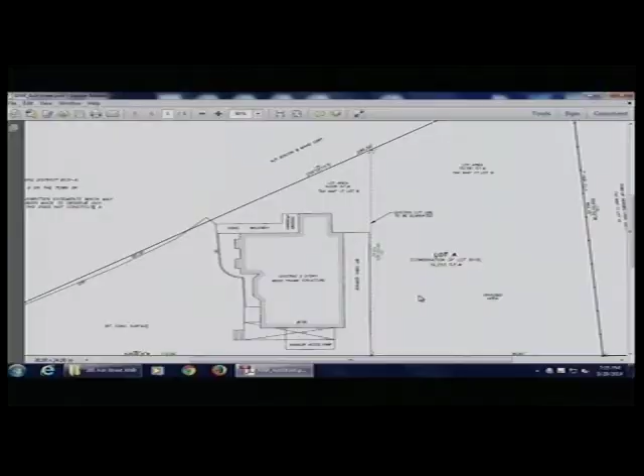So is it 198-202 or is it 198-200? It's 198, and then there was a two-family on the lot on the right, which was 200-202. Okay, and then that house got demoed about 4 years ago. So basically it's two separate parcels of land under common ownership. In order for Dr. Ravens to do the addition that we're going to next on the site plan, he needs to eliminate that line, so we're making two lots into one. That's fine, I'm just saying there's a difference.

Oh I see, so lot A is the whole thing - one says 202 and then the decision says 200. That's why I just want to get it all right. George's memo says 202, okay, we can amend that. All right, so lot A is all the way to the corner. I thought it was two lots here, but it's... right? Yeah, okay, okay.

All right, any issues, comments, questions? Can I get a motion? Move that the board endorse the A&R for 198-202 Ash Street. Second. All those in favor?

Now, is it easier to move over to this other A&R, or stick with this parcel? What do people want to do? Oh sorry, that means you'd have to hang around until whenever. Right, the South Street parcel is only here for the A&R. Correct, let's just knock that out. Get 'em in, let's knock that out.

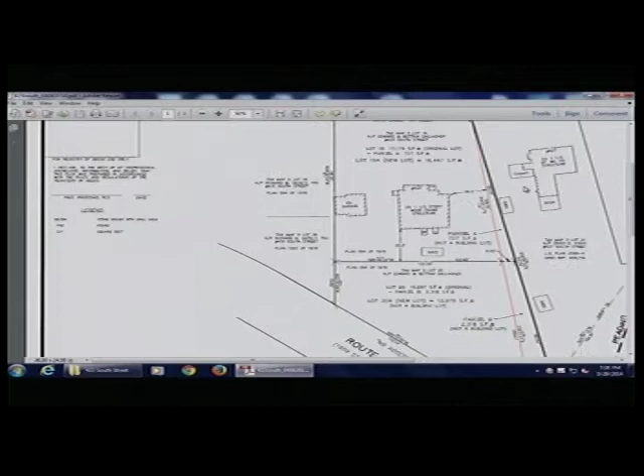I don't remember reviewing this in my package. It's page 44. Yeah, I got 46 here. Yeah.

Okay. Did we have a memo from George on this? That's on page 47. Oh, I remember that.

He mentioned adding a certain notation to the plan, and the plan in your desk packet does reflect the change. Jack prepared a change, as recommended by George, to indicate what the purpose of the plan is, which is to convey these two slices of land to Mr. Kika.

A and B. Where's A? I see B, I'm not finding A. A is the slice right above it, I see that, the smaller slice. How do these things get created? How do they get these two little slivers here? How does this end up like this? It's so weird. Well, the slivers aren't there, the slivers are being created. Oh, I'm sorry, I thought it was to combine them.

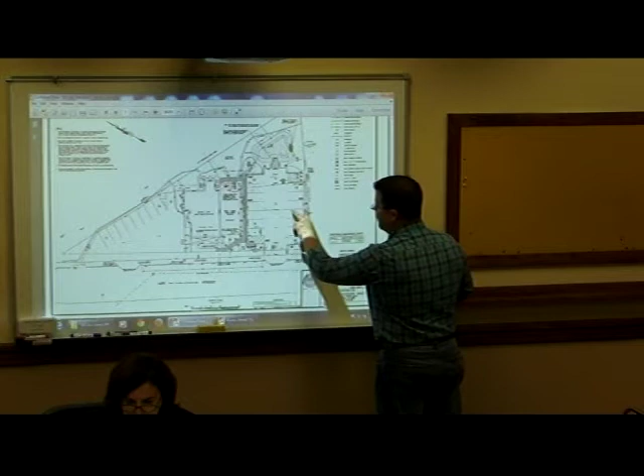The existing driveway is over in this area. So I would have ended up losing at least 4 to 5 spaces on this side. The driveway would have come up, you have a drive aisle. It didn't work with the additions proposed. You would have had a 24-foot aisle, and then we would have had a lot of extra parking to get over to the parking spaces. Or I would have had to come in and go at an angle. The alignment of the driveway wouldn't work as well either.

It is a 14-inch tree. It's not a public tree, it's on his property, not a town tree, that we're taking down. So we're trying to offset it with a number of plantings, but we're open to talk about additional plantings if that's something we feel is needed.

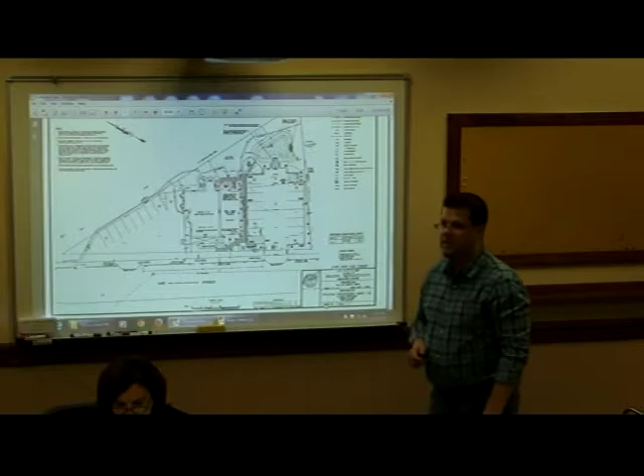One thing - the plantings that went in as part of, Nick will remember, the plaza across the street - when they did that over, it was quite a feat to get the property owner to put in large street trees on the Ash Street side as well as the Main Street side. I don't recall exactly what caliper the trees were, but they were big trees. That's been 4 years now, and they've grown a lot even since then. So I think trying to get more of a landscape component in this area, like we've done with other projects, would be certainly in keeping with the goals.

Okay. So, do you want to walk us through it? I'll walk you through it, yes.

I'm Nancy Sweeney and the project - as Jean mentioned, it's a single-story addition to the side of the building. In 2009, Dr. Ravens purchased the entire building, and we renovated both the second floor and the first floor. We were here for a minor site plan review at that point in time. So one business, he is now expanding again. It's successful, and we needed to provide 2 more operatories and some more business space.

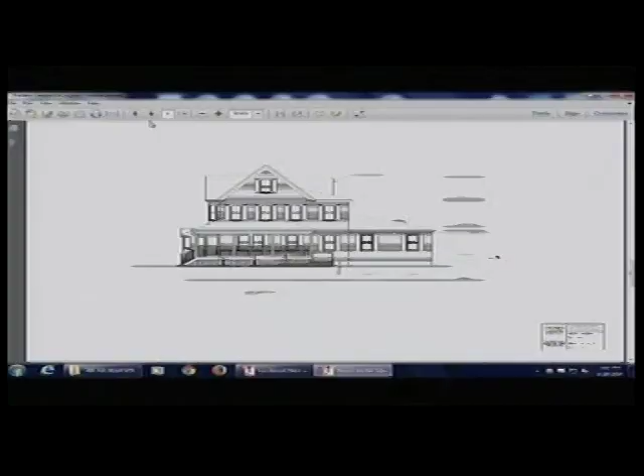So single-story addition to the side. It will look in keeping with the existing structure, so it will have the same siding, same colors, same trim, a low profile to the roof. What else can I tell you? It is much needed. I think I'll let Jack discuss the site. And thank you for the A&R that makes this possible. We do need - the building is non-conforming to the property, so we are kicked into a zoning special permit situation.

So that hearing is coming up next week. Okay, for the record, my name is Jack Sullivan. I'm owner of the Sullivan Engineering Group. I'll just highlight some of the changes. Do you mind just going to the existing conditions plan for 1 second?

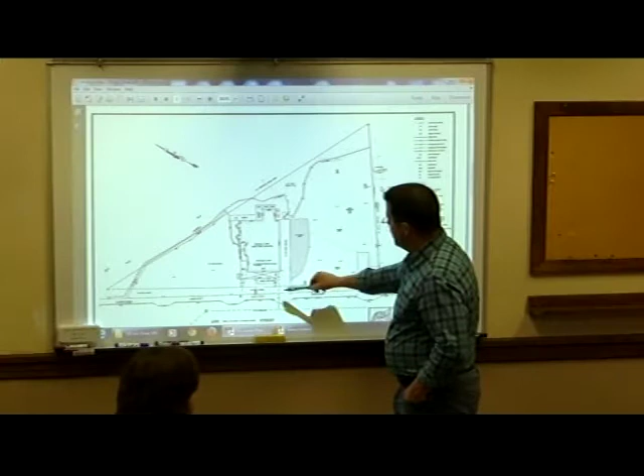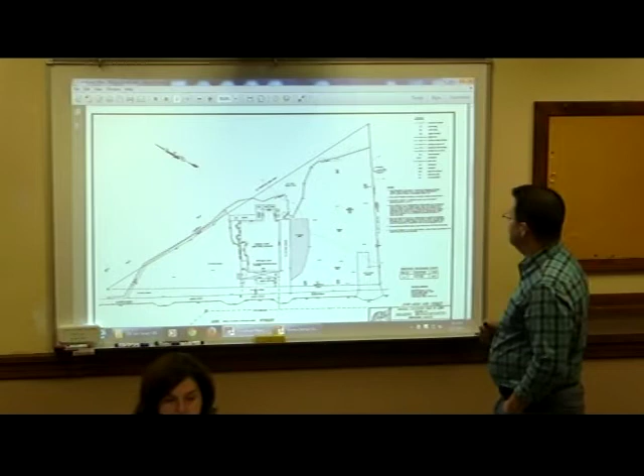So as I showed in the existing conditions plan, there are four existing curb cuts. We're going to eliminate 2 of them, taking this from 4 curb cuts down to 2. When we first submitted to the town, we were reducing from 4 to 3. There was a suggestion from the planning department to try to reduce it even further, so we did so. We'll get into some comments - the town engineer has a comment on where he'd like to see this entrance located, but for now it's in this spot. He'd like to relocate it over, which we're comfortable with, but we can get into that.

As we stated, this will be a paved parking lot. The site drainage is all directed towards the rear of the property. We're using vertical granite curbing throughout the new parking lot. For stormwater control, we're proposing a rain garden. I went out and did soil testing with the engineering department - highly suitable soils, very gravelly, less than 2 minutes per inch.

The problem on this site is it has an extremely high groundwater table - groundwater was down 32 inches. So a conventional system, when I called George and talked to him about it - typically I try to show underground infiltration systems, but I would have had to raise this whole site 2 to 3 feet to get the 2-foot separation to the infiltrators and have the coverage. So I looked at doing a low impact design, and George actually recommended that I try this approach.

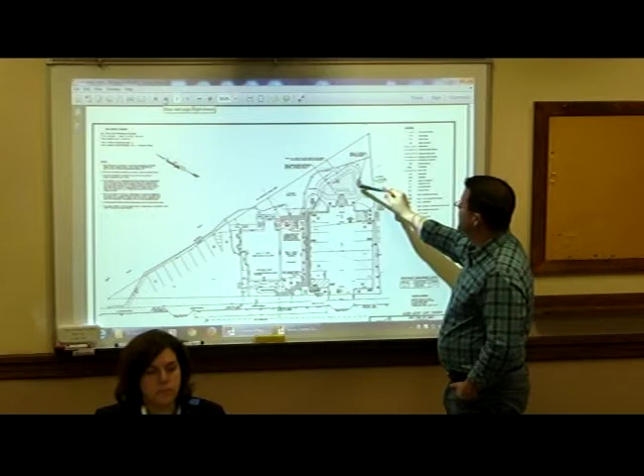It's one of the first rain gardens I've designed. We're typically proposing a rain garden sited 2 feet above the high groundwater table. It's really just a shallow depression, 1 foot to 1.5 foot deep, sized to handle the 100-year storm. There's an emergency overflow on this side that is basically riprap, so when we exceed the 100-year flood elevation in a freak storm, it would overflow.

There's an existing drain that runs behind RMLD. It's a 12-inch drain, and right now all the drainage is going to this drain. In the drainage report I submitted to the town, I'm showing less water moving to this in the 2, 10, and 100-year storm events.

This is also a landscape feature. I showed a detailed planting plan on my detail sheet showing how this area will be planted. Like I said, it's low impact. I have the parking lot draining to the center line of the lot, moving to a riprap level spreader area, so any sediment collected will be filtered through this sediment level spreader before it enters the rain garden area. So there is some pre-treatment of total suspended solids before the drainage gets to the rain garden.

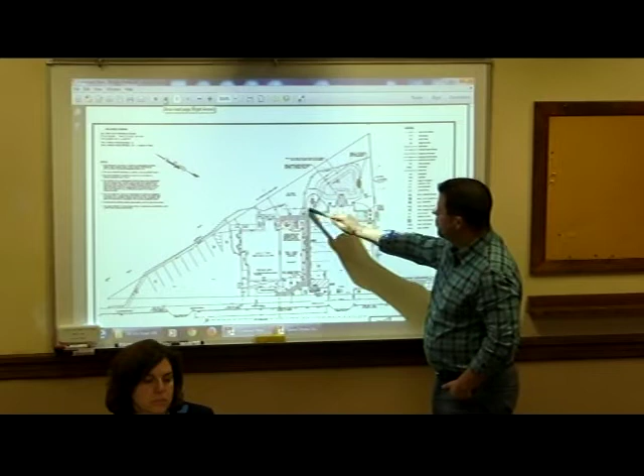I did show a proposed snow storage area for this lot. There'd be an asphalt walkway to service the rear of the building and out towards the existing entrance and handicap ramp along the front.

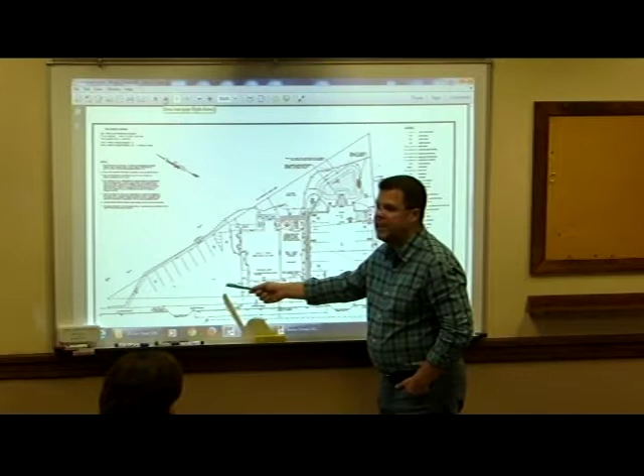Previously there was an existing handicap spot over here. I've eliminated that spot from this design. I wanted to formalize it — I'm not sure it really even met ADA standards over here. It was kind of an existing site condition from when he came in previously for his minor site plan review. There was a spot shown, but we've actually provided an 8-foot wide van access aisle and an 8-foot wide handicap space. So it's more formal, and it'll work better with the site.

RMLD is on our border. There's an existing chain link fence, I believe 8 feet high, that runs along the side line. We're proposing some plantings and trying to retain the existing tree that's there. My grades match in really well with the existing site grades — there's very little site grading needed to get this parking lot to work properly.

As far as the lighting, Nancy, we're not proposing any parking lot lighting. There will be some lighting on the building — Nancy put some details on her plans as far as the lighting. There is also a light on the utility pole out here that provides some light measures.

That's because you get plenty of light from Burger King, is that right? Is that what it is? Yeah, Burger King. Okay, good, so you don't need lights. Excellent, a lot of light. That's great, that's what we like to see.

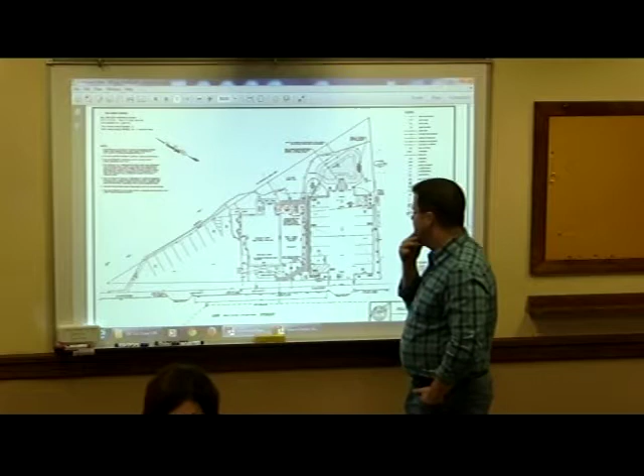There'll be no new utility connections as far as water or sewer to service this building. Everything will be done internally, and there'll be no additional utility cuts in the street.

Really, what I looked at is this was the developed side, this was the undeveloped side. I did a detailed drainage report showing how we're dealing with the impervious area. And to note, the proposed addition's roof area will be piped out to the rain garden — so not only am I taking the parking lot, I'm taking the roof area from the addition as well. So from a stormwater component, I think I've covered everything.

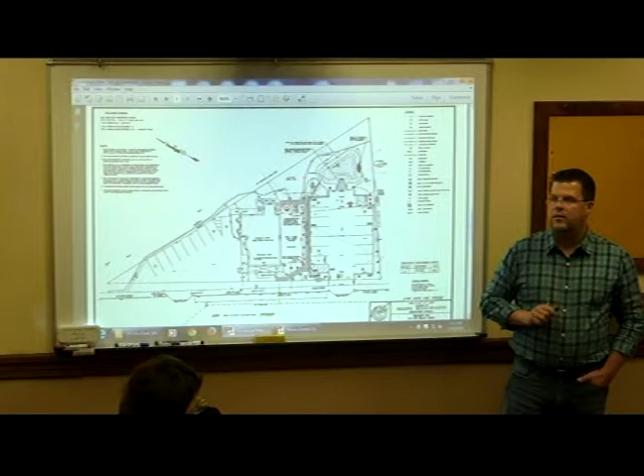We are proposing a dumpster. It will be on a concrete pad and it will be screened. We're doing stockade fencing, and it will be the same color as the building, so it's a dark brown. Originally I showed a chain link fence, and I changed it — I just couldn't remember what I changed it to, but that's what we did, we tried to match the building. I did put a construction detail noting that on the construction site.

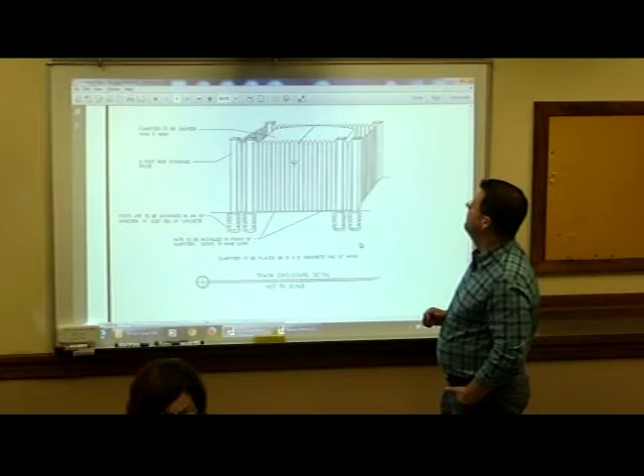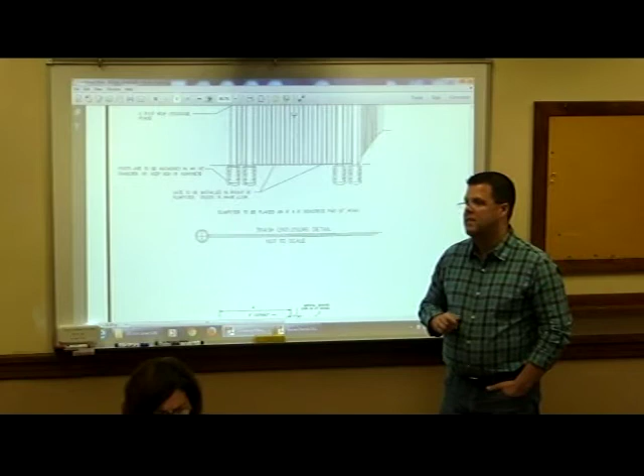And it'll be lockable. Dr. Raven says the dumpsters are emptied usually between 7 and 8 o'clock, so before his staff gets in, they're emptied. I'll turn it over to the board for any questions you might have.

So if we go back to the plan. All the water from the very front of this parking lot drains all the way to the back. There's a sidewalk here. If I was pushing any water towards Ash Street, George would have asked me to put in a trench drain to collect any water before it went onto the public way. This lot naturally slopes to the rear of the site, that's why I'm holding that slope back. I'm not forcing it, the drainage pattern that exists out there is what I'm mimicking with my design.

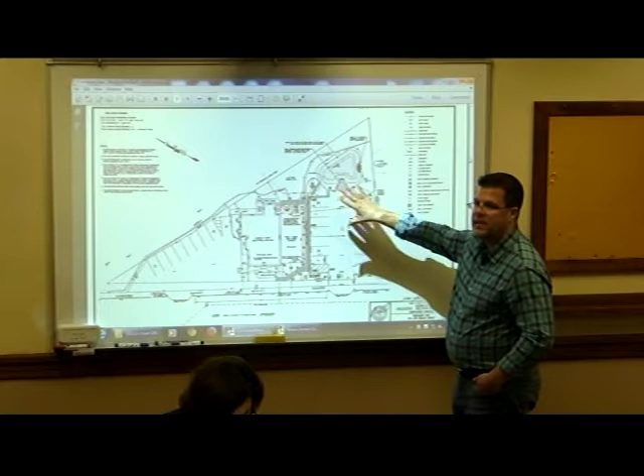And you can't put a drain in the center because of the high water table, you're saying? Correct, not in the front. Are you gonna take any water from the street? I'm not gonna take any water from the street because the gutter line's here, then it goes up onto the sidewalk, and then it steps down to this lot. So there'll be no water, I'm not taking any water from Ash Street. The water will stay in the gutter line of Ash Street.

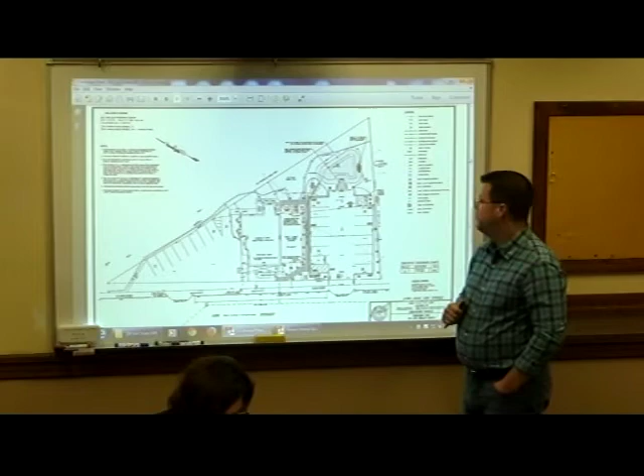This feels like a long way for the water to go. It may look it, but it's not. It might be like 80 feet of sheet flow. It seems like a lot of water to flow down the back, but you've done the calculations. I've done the calculations, and it's at 1% slope, it's a gentle slope, not like we're sloping at 5%, it's a gentle slope going back.

And I'd have to, if I went with a conventional deep sump catch basin with a Stormceptor, with underground infiltration, I would've had to bring 2 to 3 feet of fill into the site. It didn't make any sense, and I did speak to George about it originally with my concerns, and that's why I came up with this system.

So when I'm looking at the plan, it's great, you've got the snow area to the left. But if I'm a snow plower, I'm driving straight back from the front, straight to the back, and I'm pushing it right back into the rain garden, because that's easy, that's the easiest way to put it. So what impact would that have if I'm dumping a boatload of snow on this rain garden?

Well, we don't want that. If there's salt or anything that gets in, it could kill the vegetation that's planted there. There could be a sign posted saying no snow dumping within the rain garden, or Dr. Raven could talk to his snowplow operator at the beginning of each season, just saying you can't dump snow in there. I think it's gonna be very difficult to do.

It's difficult all over town. Yeah, I know. And especially with some of the heavy snow events we've had over the last few years, people run out of room, it ends up in wetlands, it ends up everywhere.

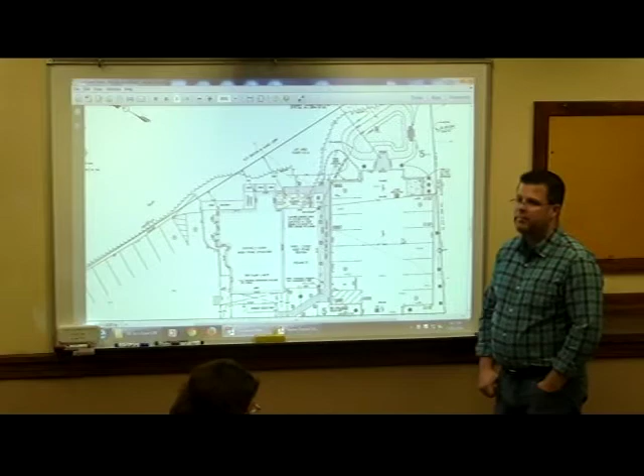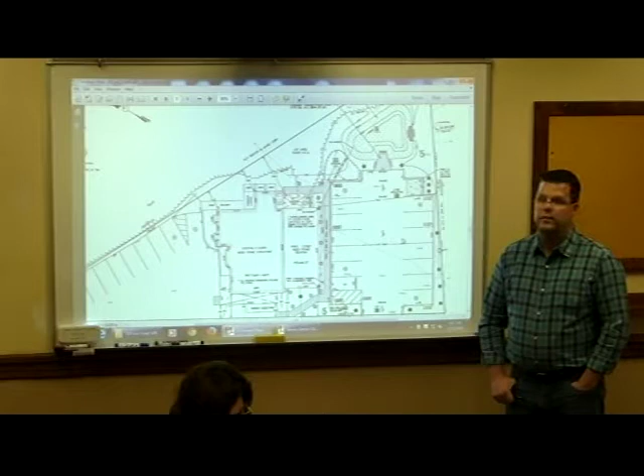That was one of the concerns at Caloriso's, remember? We were concerned that there wasn't any water at the bottom of theirs. They had residences immediately adjacent that were concerned about mosquitoes. And you said the water table is really high, 32 inches down? Right, but the bottom of my rain garden is sited 2 feet above the high groundwater table. So it should be dry, really. It should be dry, and I'm dealing with coarse gravel, which couldn't even hold water.

When we ran the perc test, you could put a fire hose in and couldn't maintain the soak in the hole. So the water table here is 32 inches below, but you're back 2 feet here, so you've depressed it by 8 inches, basically.

That's all it is. Should we go to public comment, or do people want to make more comments?

I had some comments, or questions. For the snow removal, I really think they'll maintain it to the left, because if they block it up, the parking lot's gonna flood. That's what I worry about, it would be a dangerous situation, which he doesn't want. It would flood, so they'll probably only do it once. I think he's okay there.

So you're only adding 2 operatories, right? Is that what I see? You're not just moving one from upstairs? Correct, yes sir. No, adding 2 operatories, that's correct.

So who's gonna park where? The customers gonna park on the right or the left? Patients will be on the left, and my staff will be on the right.

That's a lot of staff. Just seems like so much staff for 6 operatories of providers.

I'm just curious if it's easier to have the safer lot for... Yeah, unfortunately, with the way the house was designed, the building was designed, the entrance is on the other side. The handicap entrance is over there too, though? Well, the ramp starts right there, correct. So the entrance to the ramp is here, and the parking would be right here.

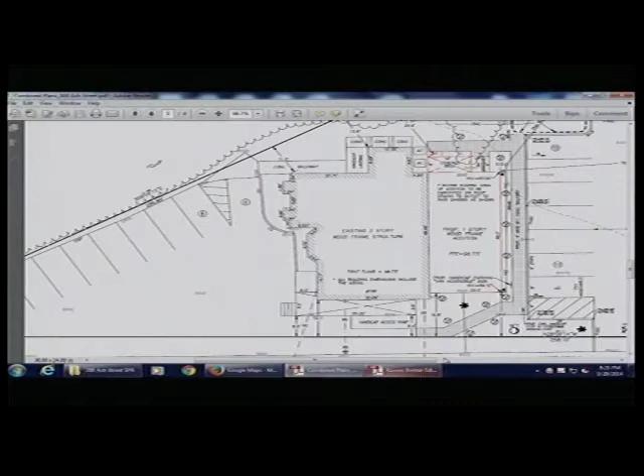See the little one there, on the right. A little bit more there. This 16-inch tree would stay. I was just trying to balance the lot and plant 2 new trees on either side of the entrance. Then there'd be some plantings along the side, 2 large trees out and back as well. But I guess I'm saying there may be more opportunity if you were to do a little bit more in the front there. You have a little bit more opportunity.

I could maybe do a little bit more. I mean, I did more perennials here. I proposed a tree here as well. So we'd have new tree, existing tree, new tree, and then scatter some perennials off of the walkway.

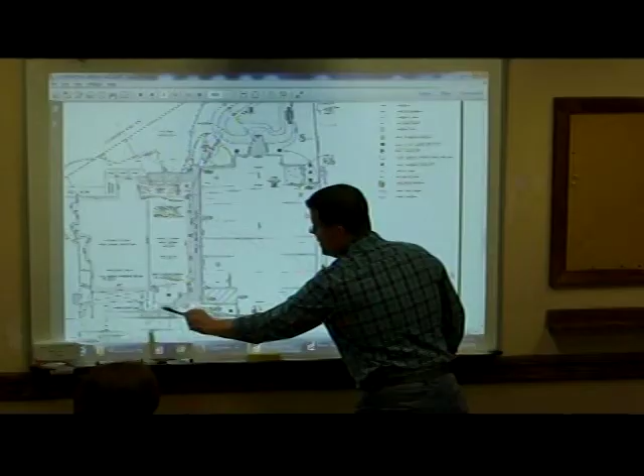I mean, you want the canopies to be allowed to grow, but I thought I balanced it pretty well, if you thought there was another tree needed. Well, I'm just looking for opportunity, other places. I mean, maybe I could put a tree here and eliminate this arborvitae. I think there's a good amount.

What was the caliper on the trees, Jack, what were they? 2.5. That's a pretty little tree. I mean, some towns have been looking for like 3-inch caliper trees. I wanna say the ones for the plaza across the street were like 4-inch. Yeah, 4.

I mean, I'm looking at the plan and who would I spend the money on? I would spend this money west of the existing 20-inch tree on the fence line. So that's where I would spend it, south of the handicap ramp in that landscape area. I'd spend it at the entrance to the lot and west of the tree.

I really don't care what you put behind the dumpster. I don't care if it's screened from anybody, it doesn't affect anything. You're talking about the front, Nick?

Yeah, well just between the existing tree that's staying and the ramp, there's a landscape area that has his path winding around against the building. So that's a nice section that he's gonna fill in with a tree and some other shrubs. And there's some landscape areas to either side of the new parking lot entrance. I wouldn't bother spending a lot of money landscaping behind the lot. Just keep it to the front edges where it's more visible.

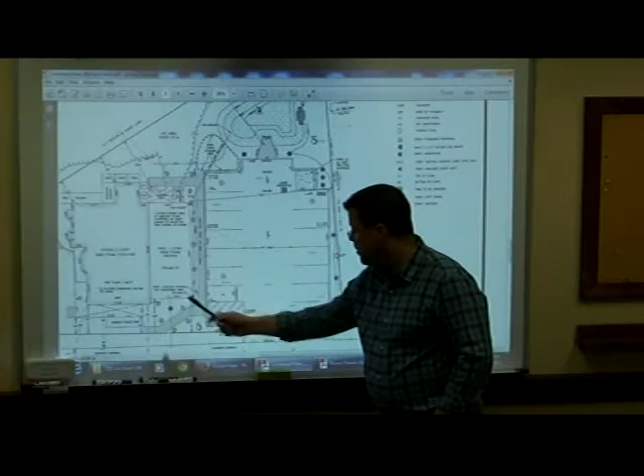And that's really what I tried to do. These are just some arborvitaes here, those are inexpensive plantings. Those are 2.5-inch caliper trees that maybe you'd like to see larger, but that way those will grow in over time. Maybe there's a little bit of room, but that's why I did propose a tree here that would grow in over time, this one too. They could be larger caliper if you feel it's needed.

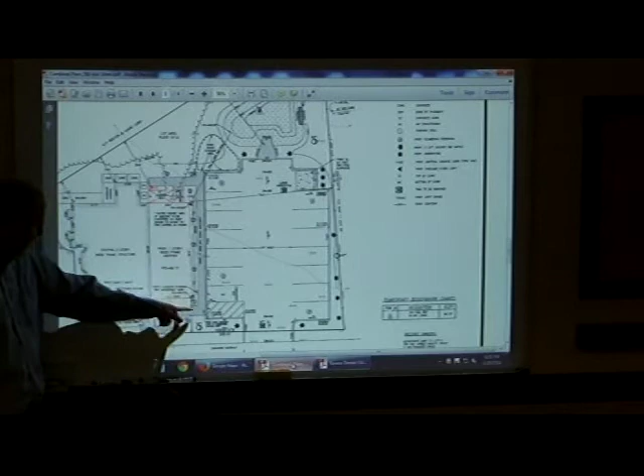Even once you look at the plan, the street layout is halfway through that. Here's the street layout, here's your sidewalk, and it comes out—you need to keep this path. But the fact of the matter is, there's another 8 feet between the back of the sidewalk and what you really need to have paved. It doesn't go that far back, and that whole stretch, let's call it 4 feet off the front of the ramp, doesn't need to be paved. It just adds to the hardness of the front of the building.

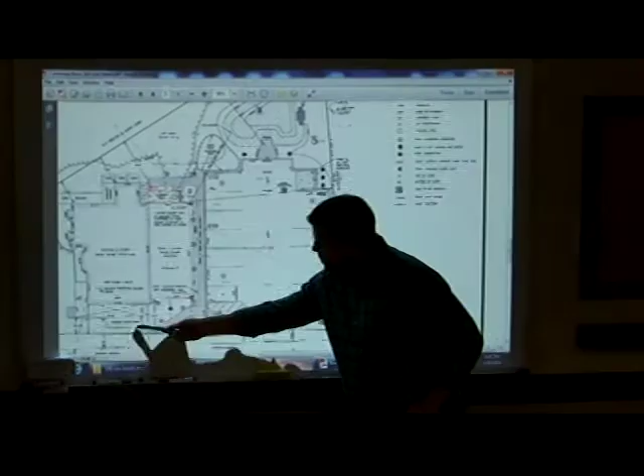Yeah, but that's the town right of way. And that's a good point—from that ramp there's 4 feet to the lot line. That's the area we can basically do anything with, because the rest is paved or concrete within the public right of way. I'm gonna guess it wasn't the town that paved this 8 feet between the sidewalk and the front of the building. No, we paid for that.

So I think if there's an opportunity to make a tree lawn, or something a little less hardscape, that's the place to do it. Yeah, that was the only spot we could put the handicap ramp coming out. And Nancy did a nice job with the porch to conceal it somewhat, so aesthetically when you look at the building you don't really see that. But then there's an issue of snow removal—there's a lot of clearing that has to be done there, so it's easy for the plow to just go right through it.

So those are the opportunities where we could put some improvements—I know it may not be ideal for snow, but it would certainly dress up the front a little bit. The easiest thing you could do is put planter boxes down there if you didn't want to rip up the asphalt, and some trees.

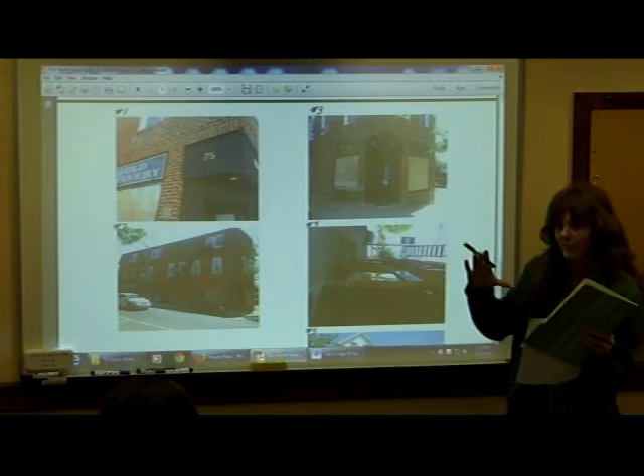Because it's the photo number 1 that's marked, you can see the vertical brick line above where the old gold refinery sign in 75 would be. Just about here, it'll hang off the first brick pillar. And I intend to have vinyl mimicking exactly as a blade sign, one circle on each window. The 24-inch circle would be identical, and that would be all the signage. This is all solid black to match the facade now, with some plantings.

So make sure I'm understanding - where it says gold refinery now, you're gonna take that away and just be solid black? It's already gone, those signs are removed. It does need to be patched up a bit. And then in the windows, you're gonna put a round logo that'll match the blade sign, that's printed in the packet. There'll be one circle per each window on the glass, yes.

And then this, Gene, can you go back up - so you're talking about putting it above? Yes, it'll hang - it actually mimics the girls on the sidewalk here, Leah's hair salon, so it'll run coordinated with their signs. There are two blade signs already, so it would be at the same height. Same height, and yes, so the storefronts would be one, two, three, right down the path here - Leah's blade sign, and I believe the cosmetic store.

Isn't it, I'm sorry, can you go back up again, Gene? Isn't it like in the brick between the gold refinery sign and the number 75, as opposed to above it? When I did the measurements, I had measured just at the top of the brick line, which is where the bracket would sit, and then it hangs down. Yes, it hangs down from there. Right, the bracket goes up above, and the sign actually hangs down in that same space, in that area where the 75 and the gold refinery is. Correct.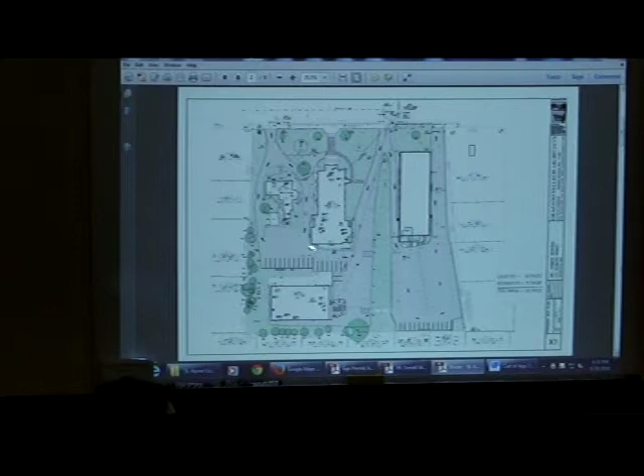We heard the neighbors say that if the traffic comes in as it's shown here, you're gonna have headlights on these neighbors. Conversely, if it comes in here, you'll have headlights on these neighbors. So by reversing it, you end up avoiding a good deal of that situation.

Ted also indicated at the meeting with the neighbors about having an attractive solid fence around the back area, which is now a rusted chain link fence.

Basically, the other question I think Gene asked was what's the comparative size of the units when you move them. And what Ted has indicated to me is that of the one bedrooms at Johnson Woods, they're between 1,000 and 1,100 square feet.

If those one bedrooms were moved to St. Agnes, they'd be the same size, relatively. The two and three bedrooms at Johnson Woods are between 1,200 and 1,400 square feet. Those units at St. Agnes would be 1,100 to 1,200. So it's maybe a reduction of 5 to 10% in the size of the 2 and 3 bedrooms.

I think that was the question that was unanswered before. So the hope was that you'd see it appropriate to consider amending the special permit through the proper process to allow the 6 units to be moved from Johnson Woods to the St. Agnes building, and then get the 2 bonus units as well at that location. There'd be a total of 23 units proposed for St. Agnes School. I'm going to ask at this point if Craig might describe some of the exterior changes to the building and maybe some of the layout.

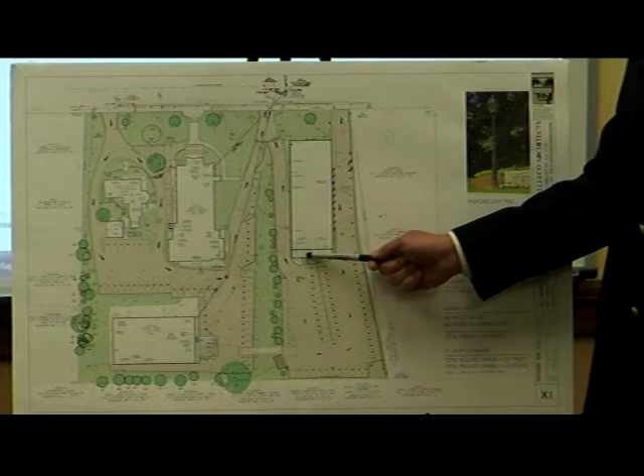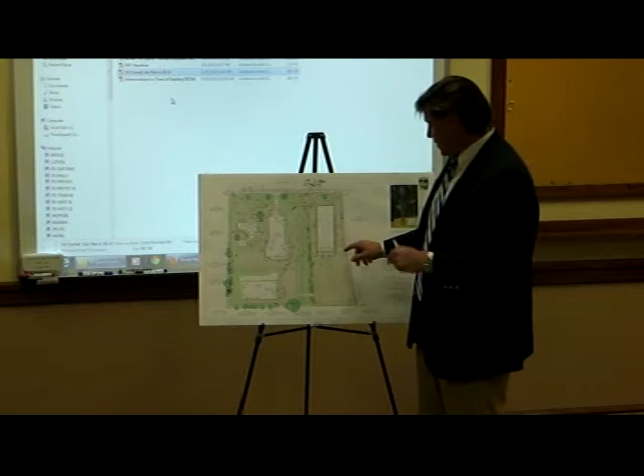So again, this is our building. Our goal is to create the main entry off to the back, because I require an addition to the back. This addition will house our trash storage for the facility, mail room, and the main entry. I'm going to create a new main entry so it'll be attractive, with an elevator and staircase. Right now this building has concrete slabs, floors, and a gymnasium. We're going to be doing a lot of work on the interior, but by doing an exterior type of addition, I'm able to create a new entry and utilize the space back here as a form of entrance for my vertical circulation as well. That's the reason why the entry has changed.

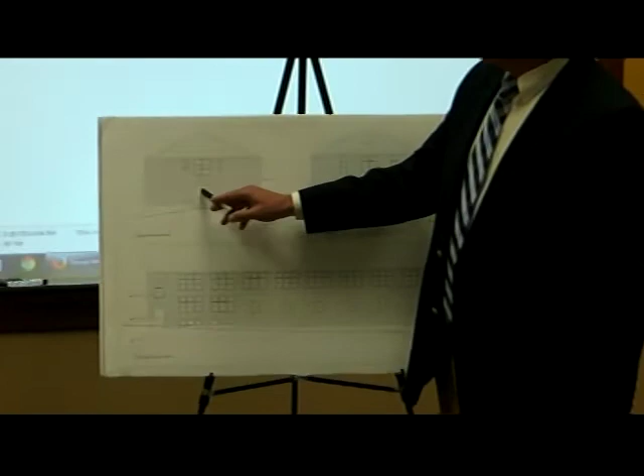Coming back around to the existing elevations, this represents the Woburn Street side, the main entry today. This will go away. You will see the proposed elevation shortly. For the most part, you're seeing a brick building with a simple gable roof over it. It does have a cupola, which is not represented here. In our event, we will lose the cupola and just have a brand new roof put on top.

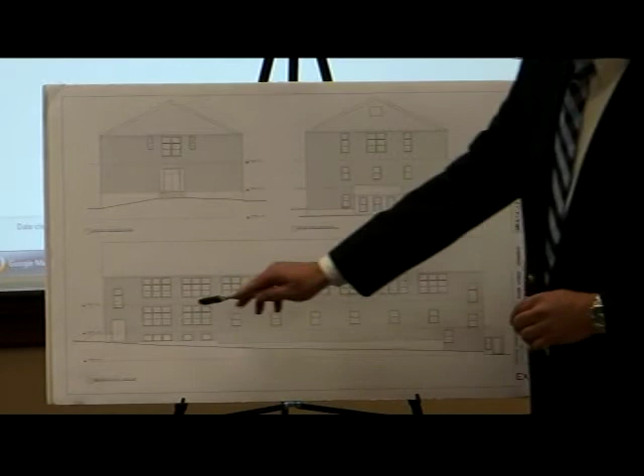In the rear of the building, if this is the front, this is the back side, there is a little bump out to the back. Our goal is to eliminate that, and I'll show you in a second that this is the area that we propose to do our additions. As a school, it had classrooms, so there was a lot of natural light up there. That's an asset. Anytime you do any kind of residential housing, we need to have windows for egress requirements in bedrooms, as well as for daylighting in all of our public spaces. Where we had a gymnasium, you'll see in our proposal that we are banking in a bit more glass as a requirement for our units.

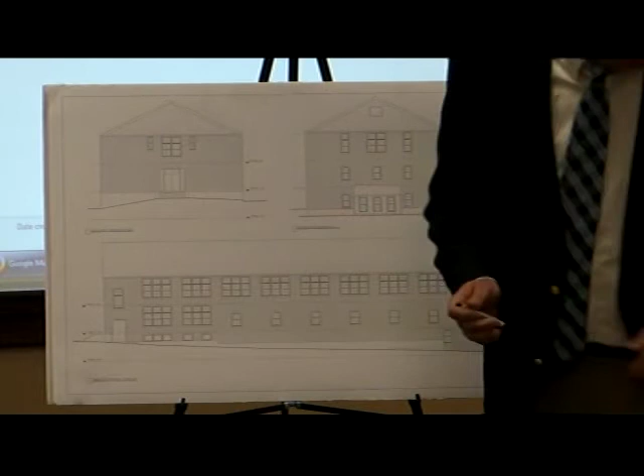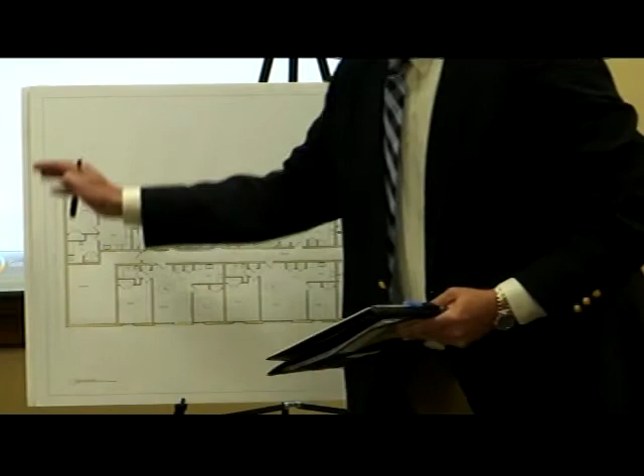The floor plans. There's a whole lot of fun stuff to talk about here, but from the standpoint of this being Woburn Street, you've driven to the back, you have your main entry now. This is the area of the addition. As I said, mailroom, I had to have a mechanical room for an elevator. There'll be a main entry for the building with a staircase, elevator, and an area for trash. There'll be enough units there in order for residents to put their trash and recycle in, and then it gets pulled out, and your department will come down and pick up the barrels here at this local area.

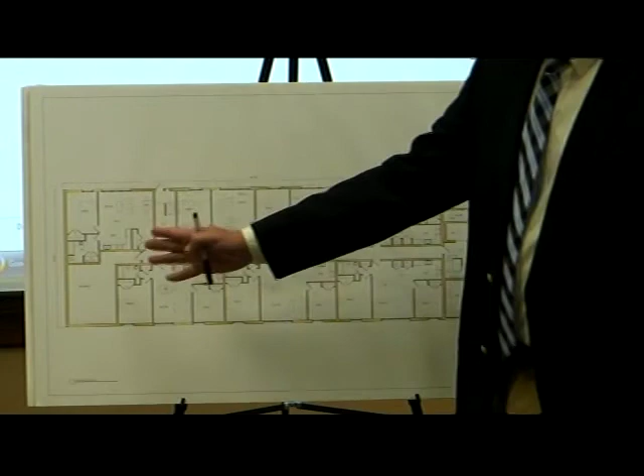The two points, obviously this will be the main entrance now. It has a center corridor that takes you as deep into the building as required to have access to all of our units. Our second means of egress with its second stair will come out to the right-hand side of the building. If this is Woburn Street, it would be the left-hand side. If this is the main entry, to the right-hand side, so as people are driving down the side lane. The first floor, by map, the way it's designed right now, has 3 one-bedroom units, 4 two-bedroom units.

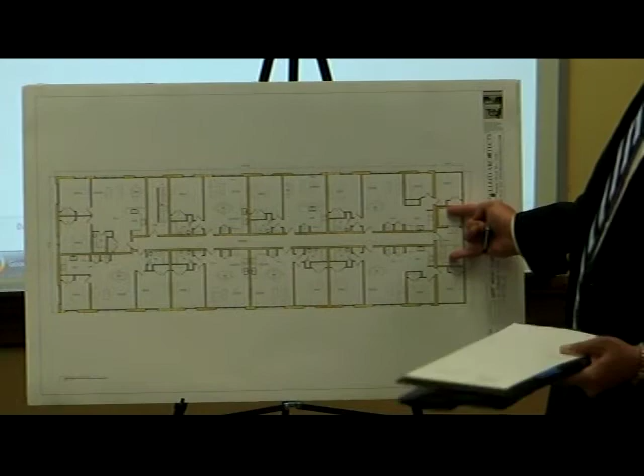Similar, second floor, you're going to see the vertical circulation, our elevators, our staircases take us straight up. You'll still see that main corridor, second means of egress, and units around the perimeter. The second floor allows us to grow out over the space to create the 2 three-bedroom units in the rear of this floor. Second floor consists of 4 one-bedrooms, 2 two-bedrooms, and 2 three-bedroom units on this floor.

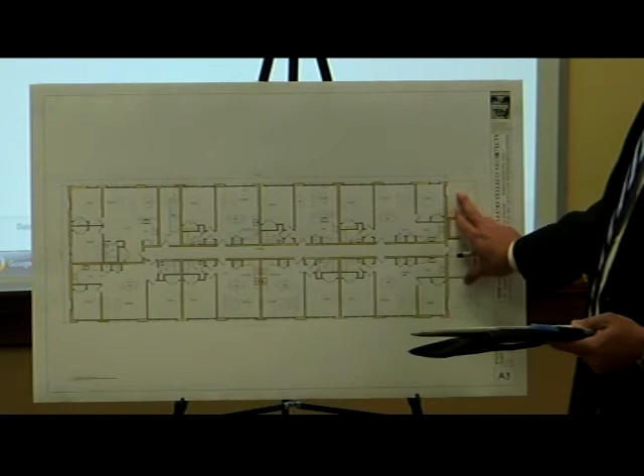And lastly, again, this vertical circulation comes up. You'll see in a second the elevations, but there isn't any form on the 3rd floor as this is the zone of our proposed addition. The main corridor again, second form of egress staircase, and the 3rd floor consists of 4 one-bedrooms, 4 two-bedrooms.

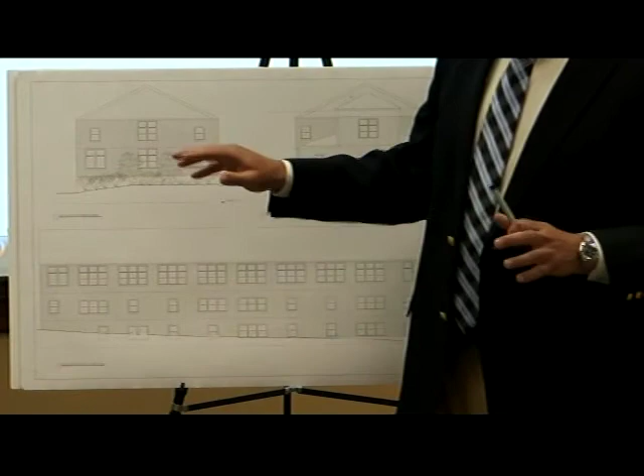All right, from the exterior elevation standpoint, this is our proposed scheme. This represents the Woburn Street elevation where we once had that front entry. We're going to do away with it. We're going to be punching in more glass as these become residential units. The front area, from our perspective, it's our goal to make that a park-like element. Don't hold me accountable for any of this greenery, but the intent is that front area, right now a common sidewalk entry point, will become more of a park-like element to the front. This represents the rear elevation.

So this is our main entry to our facility. We will have our trash rooms, our mail rooms, our mechanical access points for elevators. This stem is basically where our staircases and elevators exist in this new addition. This is the brick form that's existing behind.

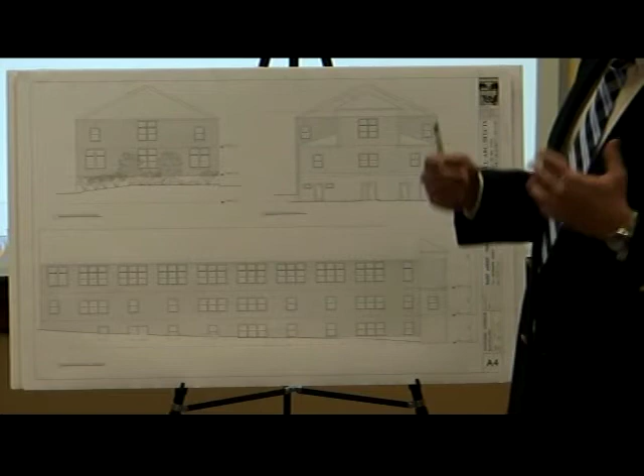For materials, we're going to use HardiePlank, composite materials, and asphalt shingles. It's meant to last a long time. That's the kind of construction materials that Ted likes to use for his developments. It's what you'd see over at Johnson Woods.

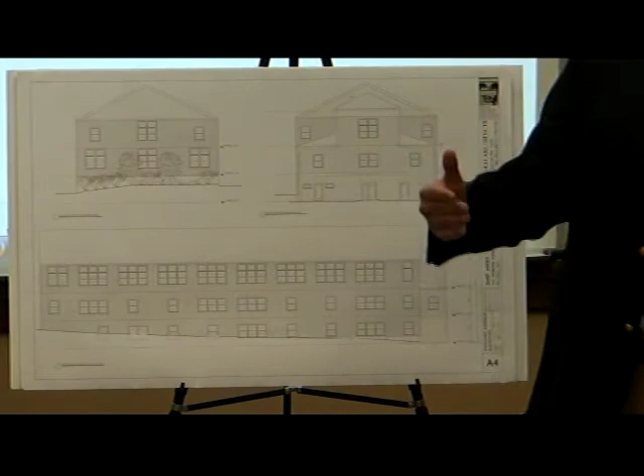You might pick up on the elevations. You can see there's a rhythm of windows being punched into the exterior elevations. This is a requirement because I'm trying to use larger pieces and groups of glass in those living areas, with windows in certain bedroom areas required for egress. So that's what you're seeing in the exterior elevation.

Lastly, the other side elevation, not much different in context. You're going to see a lot of glass going in here as the program requires it behind the facade. You're seeing the side elevations of our additions there.

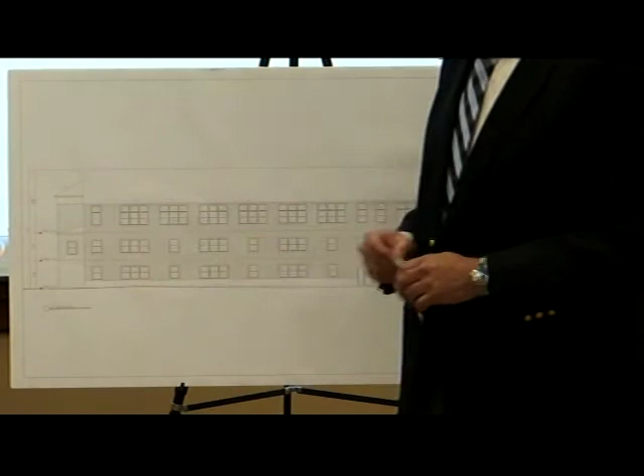These are 2D. From our perspective, it's a little easier to showcase things in 3-dimensional forms. People seem to understand these diagrams a little better, so there are a couple images here that help illustrate the point we're trying to address.

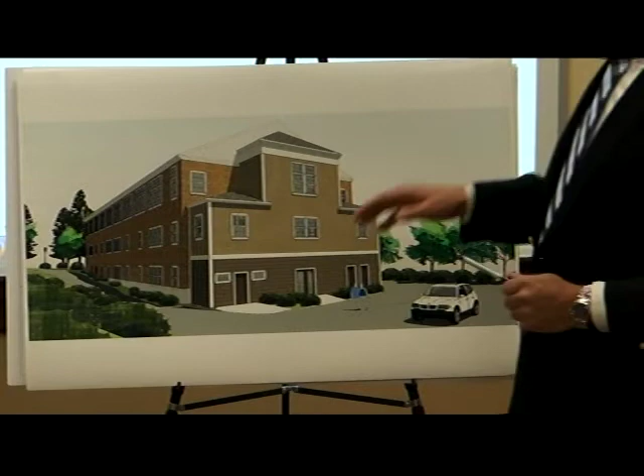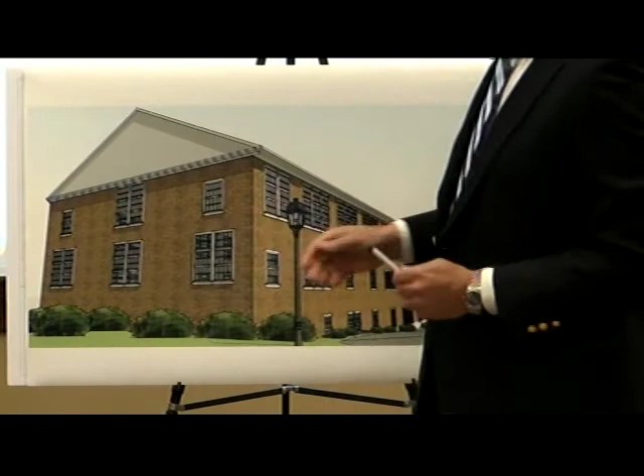I think lastly, this is important. There are other things we're going to be talking about, lighting and things of that nature, but it's meant to take it down to a residential scale.

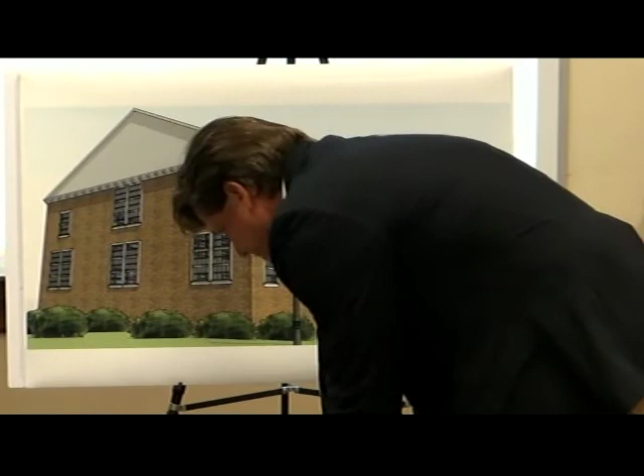When we do these types of developments, this is a light pole that's illustrated on our site plan, partly buried in here someplace, that we're showing in our document. This is the light pole we're proposing to use, and you can see this at Johnson Woods if you were to drive around there.

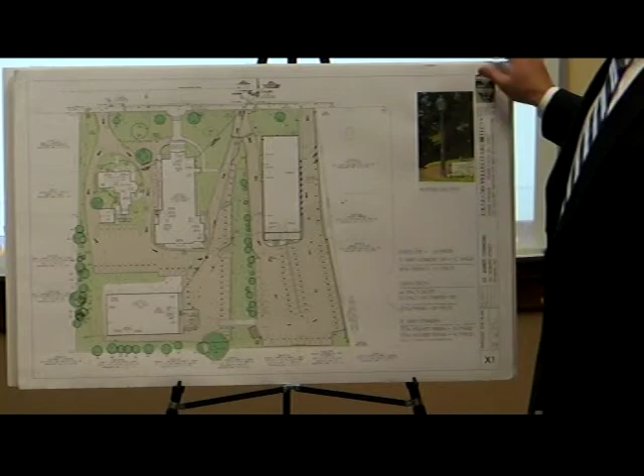Instead of large spotlights, which are currently there beaming down on the building, we'll take it down to a residential scale, and we'll get to a point where we know specifically where these light poles are, but this is the nature of that. I think that kind of wraps up the presentation for what we're proposing to do here. Just open up for questions now.

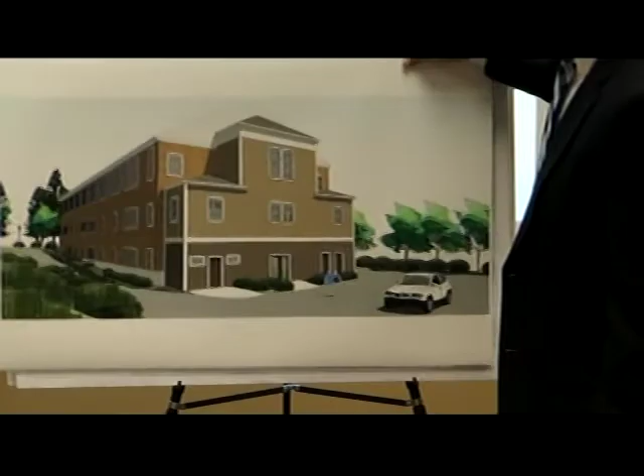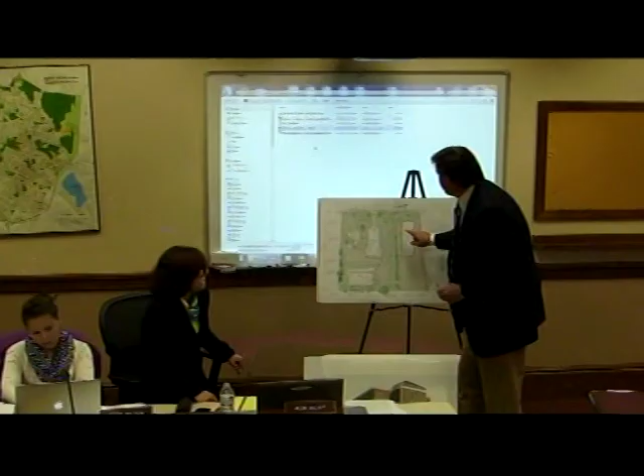On that particular view and the church side elevation, there's a grade change from the street down to the parking area in the rear. Are you planning a window well in there adjacent to the building? There are window wells up towards the high end, that's correct. You can see that on the site plan. There'll be 3 locations where window wells are required because that's the egress requirement from those bedrooms in the lower first floor, what we call the first floor elevation.

And you're not currently planning any canopy or treatment on the side entry? No, not at this present time. Did you see that elevation? Yeah, I did. It was bare.

So I was sort of troubled by the front of the building. You want to have buildings that are communicating with the street, and to cut off any access between the front of the building and the street just doesn't seem like a good way to go.

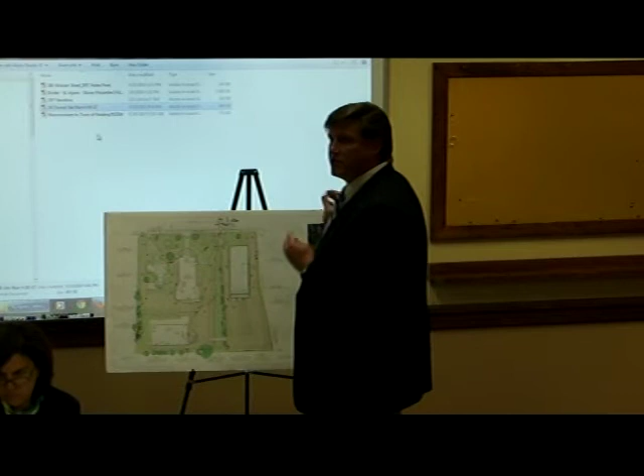I appreciate that, and we did a diagram maintaining that, as it would be a simple thing for us as a matter of egress to have one spine running from front to back. But what happens in a floor plan like that is you cut into the 2 units in the front of the building, and you lose the volume down there to make a 2-bedroom unit work. So from our standpoint, and the developer's standpoint, it made more sense to turn out after I got as far as I needed to with a corridor.

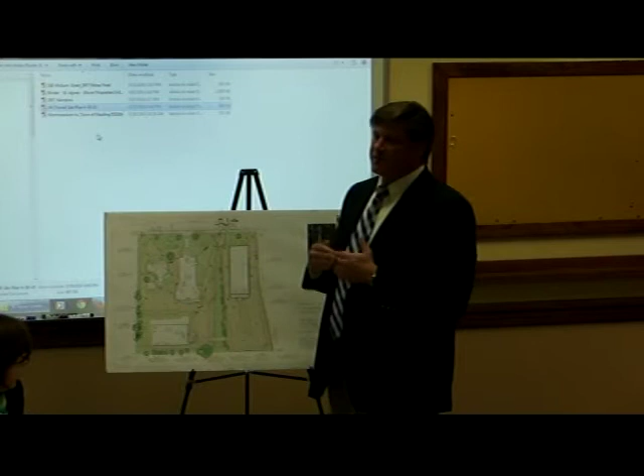So, but you would only do that on the first floor, right? You could try to, but you still want your staircase to be local to that location. Right, but you put up the first floor, right? Yep.

So what happens is if you put the stairwell on the exterior wall, you're giving up the exterior wall to a stairwell. If you took that space out, you've got your stairwell where it is, so it's just on the first floor where you lose some of that space for those units there. Well, but you've got a grade issue.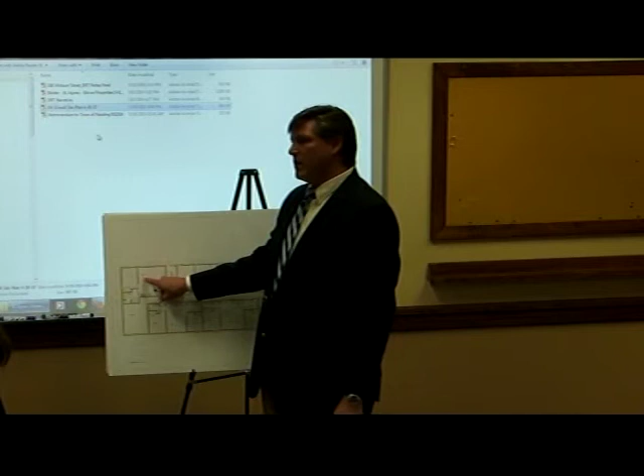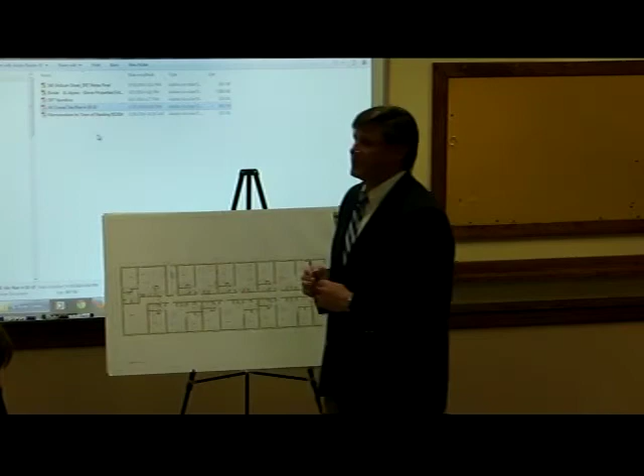Right now, that entry is approximately 4.5 feet lower than where this proposed floor elevation is. If you were to see the existing floor plans, it's almost a half floor differential, it's split there. That's good, that bothered me.

That looks like it turns its back on the street. And whether you actually have a door there, I get that doesn't quite work, but doing something so that it doesn't look like it's facing with its back to the street, it is a prominent location in town, right on Main Street, next to the church, and having it sort of that way. But by the same token, that provides a view to the street for the tenants.

That they would not have otherwise necessarily. I don't have a problem with not having access from the front. I think they can dress up the front better, a little bit more architectural detail. Not as much of a problem with that back. That back is by far the worst thing I've seen come out of this architect's firm.